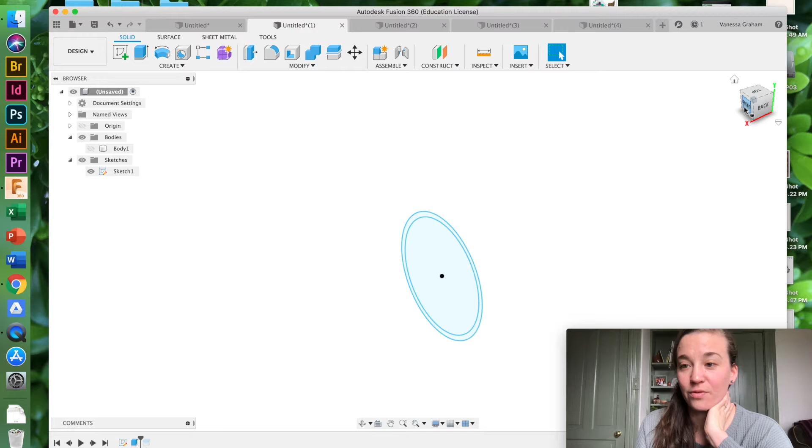So I have created my interior ring, my exterior ring, and extruded that central part to create just a plain rectangular ring, and I'm going to be working off of that in order to create a patterned ring like this one.

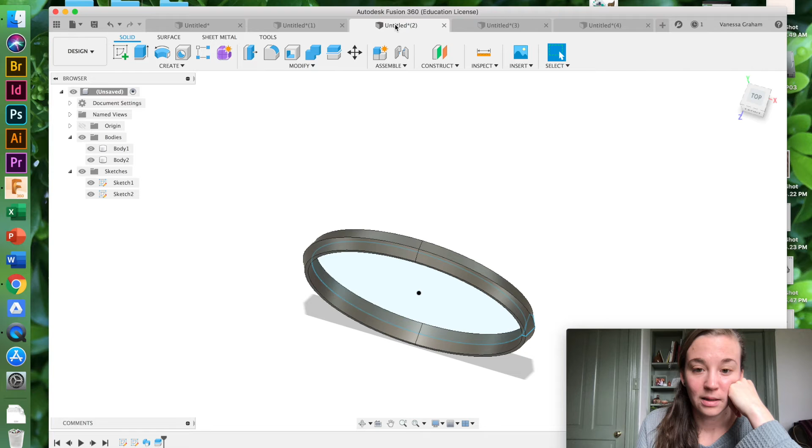Okay, so the next thing, after I have whatever ring I want to create my pattern on, I am going to decide what type of shape I want my pattern to be. In this case, I used a hexagon, and I want to create a sketch of that. So whatever I want my pattern to be, I'm going to go ahead and sketch that.

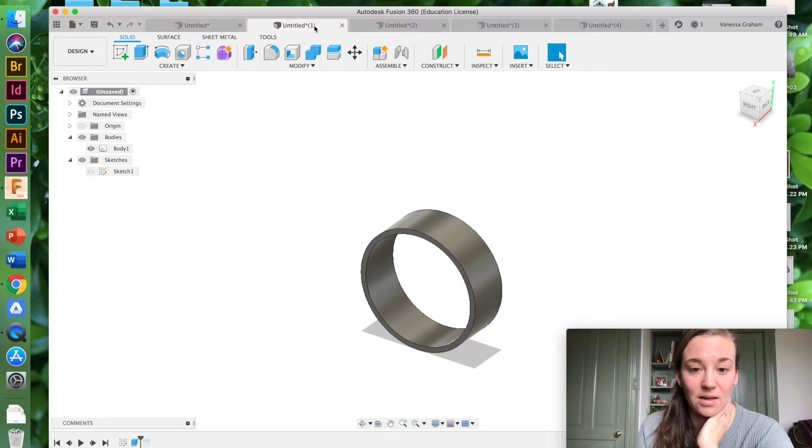And I again want to do that from my top view so I can line it up here on my ring. So create sketch on this plane. I like to turn it so I'm looking at it straight down like that.

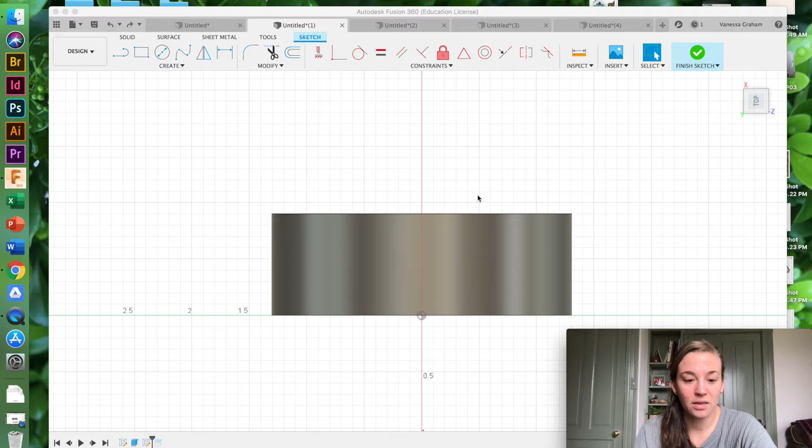Okay, so now I can choose my tool I want to create, or the type of sketch I want to create. If I wanted to do a circle, I can choose a circle. I can also choose an arc or an ellipse if I want something a little different. I use this polygon tool to create my hexagon.

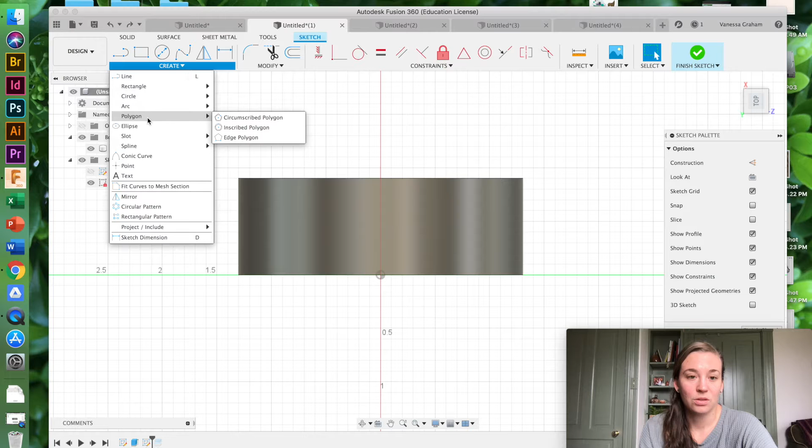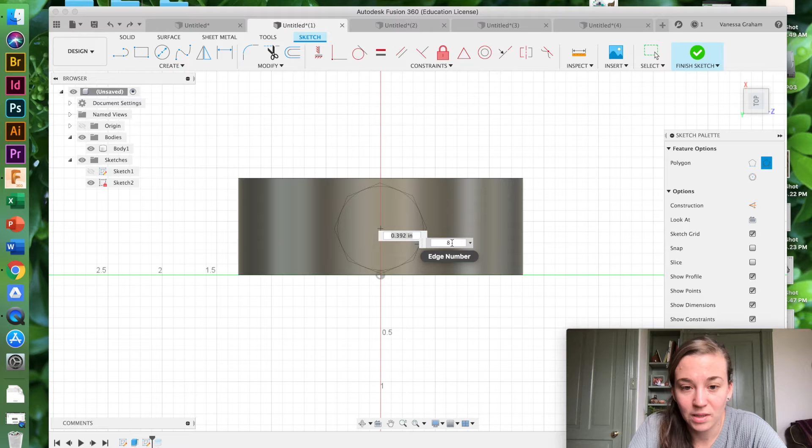So I have 3 different types of processes I can go through to create a polygon. I usually just choose the first. It's a little bit easier to get lined up, so it's asking me to place my center point, and right now I have chosen 6 sides, but if I wanted an octagon or something different, I could change that. I'm going to keep it at a hexagon, and actually I think I want to put it this orientation this time.

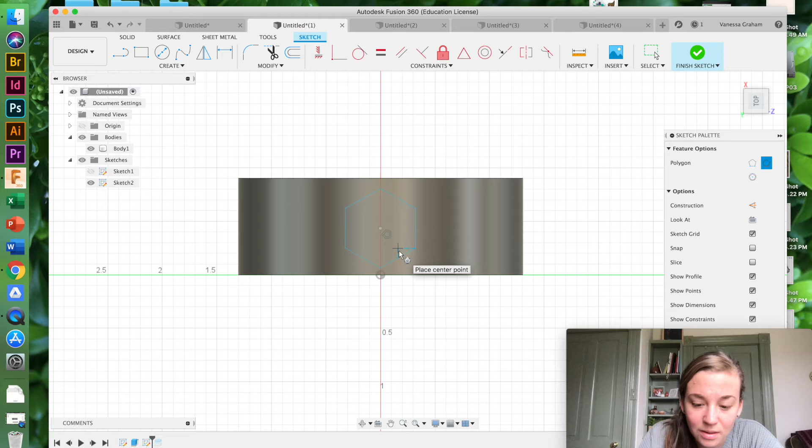Okay, so now I have my hexagon. It's not perfectly centered, so if I want to, I can move it. Again, I hit my M key, so my move copy menu comes up. Or, how else do I find it? Right click, move copy.

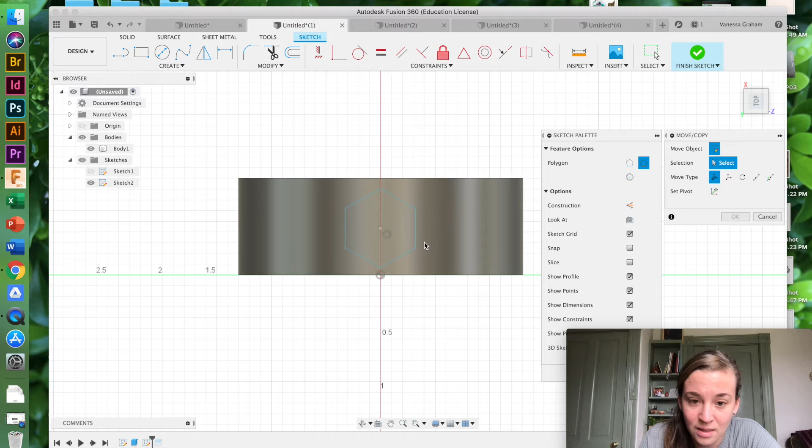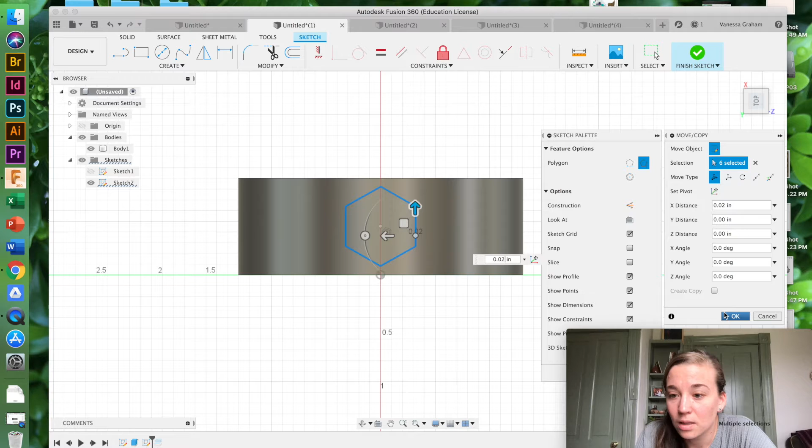So if I double click that, I will select every single line. If I do not double click it, I will only select one line, and I want all 6 of them so I can do the whole shape. And I'm going to just bump that up. Of course I need to do it just in some tiny increment. I never changed the active units in this file to metric, so ignore my inches, it should be millimeters. Okay, that's a little better.

So I'm going to go ahead, I have my hexagon, I'm happy with it. I'm going to select finish sketch. And now I have my sketch, and it is right in the middle of my world because that's the plane that I sketched on.

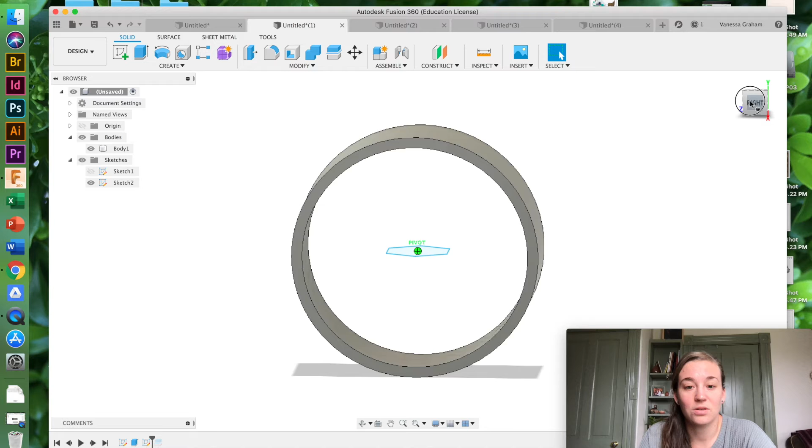So I can move it in a minute, but first, there again are multiple ways to create this hollowed out hexagon form. I went with, I can extrude it and then shell it. Let's do that.

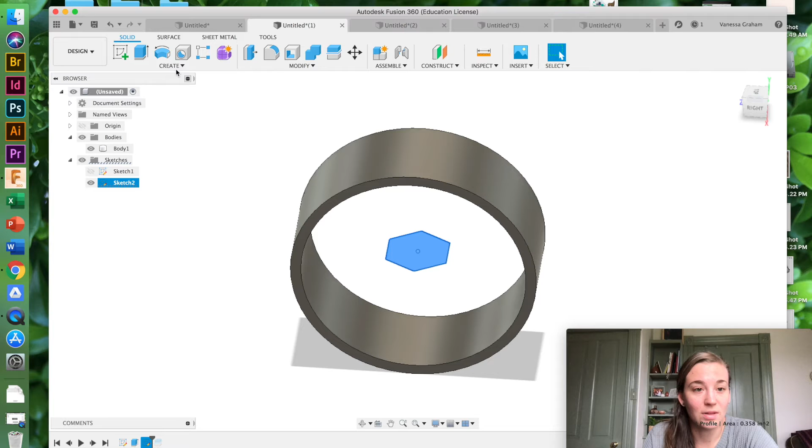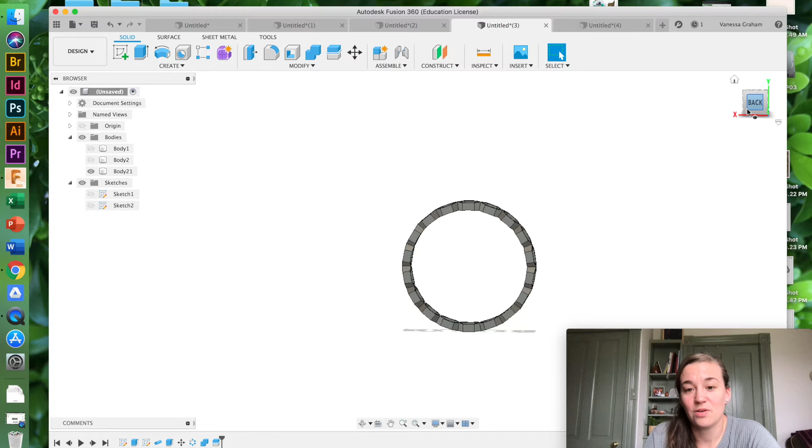So, extrude. I want it to be thick enough to cover, depending on what kind of ring you're wanting to make. If I wanted to make one that's like this, I actually want it to be fat enough to cover the thickness of my band. If I just want it to kind of be a surface detail and have a normal band underneath that it sits on top of, I don't really need it to be that thick, but we can adjust that later.

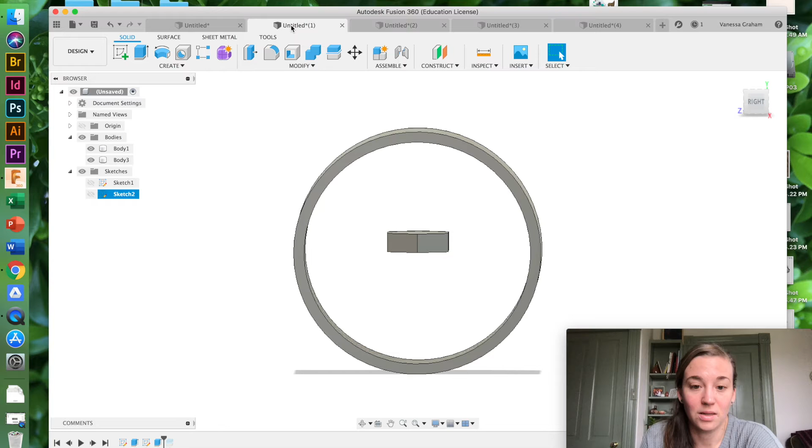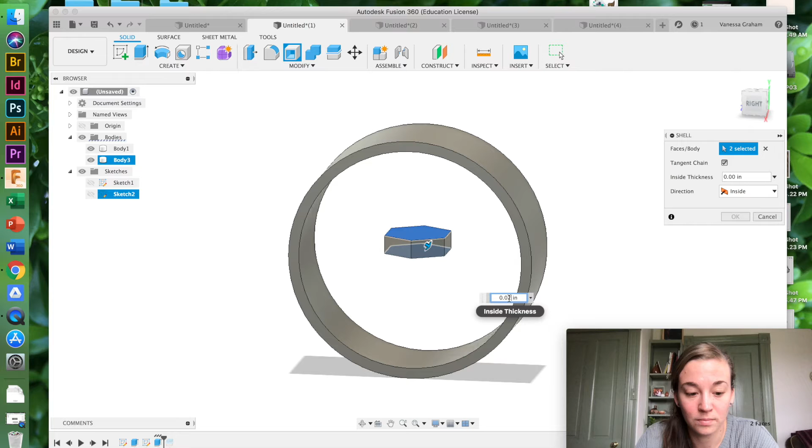So I'm gonna just, sorry, I should close some of those. Have it this large, and then go ahead and shell, and I want to shell that surface and then shift and click the back as well, so the top and the bottom. So now I have this kind of shelled out form.

I might want to make those walls a bit thicker. Oh wait. Well. Let's see, 1.5.

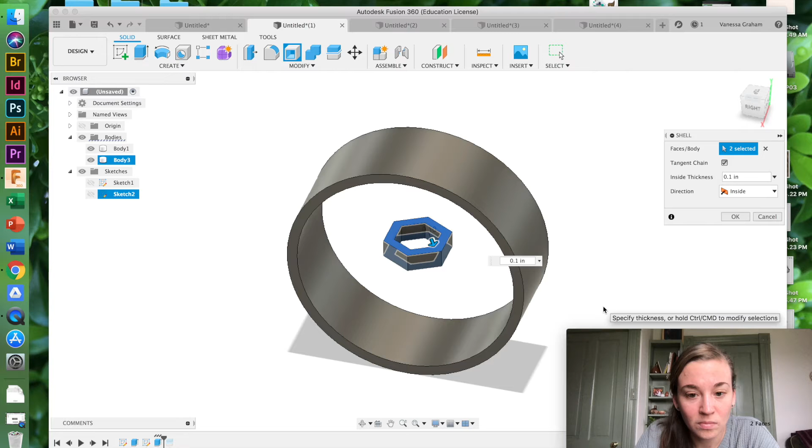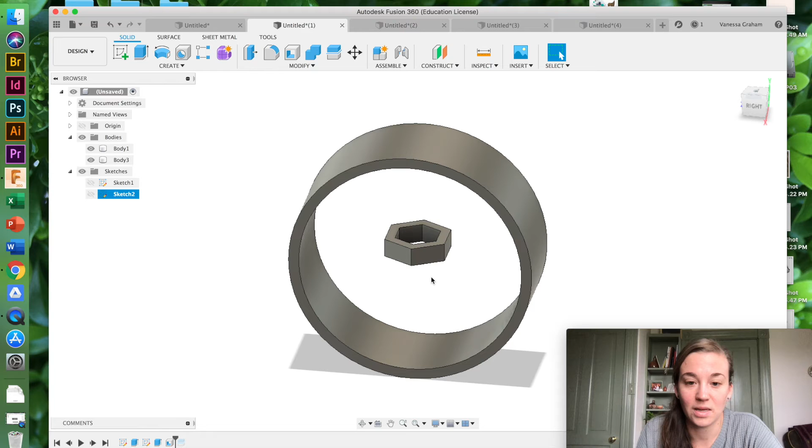Okay, I'm just being picky now. It's a little bit thicker than the one in my other ring, but I'm going to go ahead and move that now. So again, my M key, or I can right click anywhere on my screen and select move copy from there. I'm going to move this up and rotate to my right view so that I want them to be overlapping.

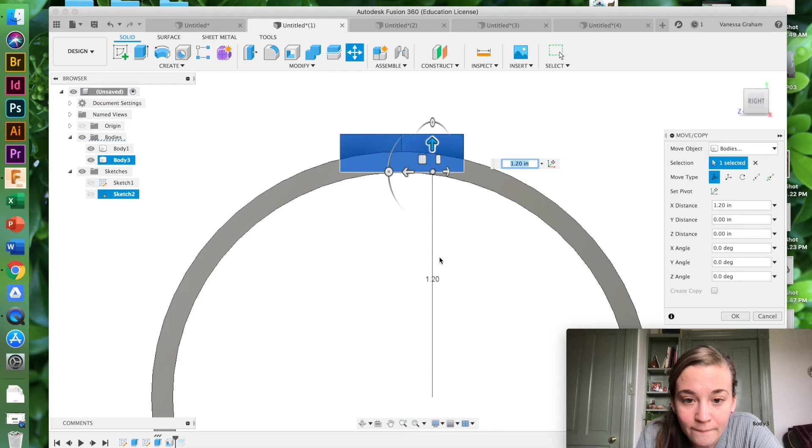So now I have this little detail, and if I wanted to, this is good enough for the project. I can just add one little sketch. It doesn't have to be overly complicated. It can just be a geometric ring. But if I want to continue this around the exterior of my ring, I'm going to use my pattern tool.

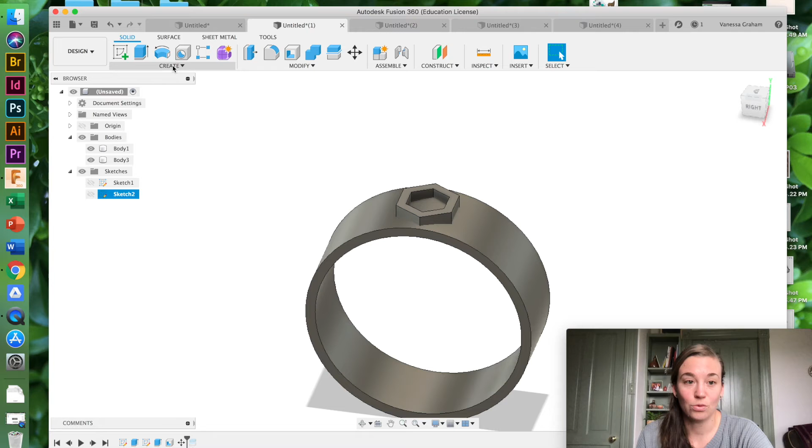So create, and then pattern. I want to create a circular pattern. So what object do I want in my pattern? I want my hexagon. What is my axis? It's this central one straight through the middle of my ring. And then I'm just going to put as many as I want on there.

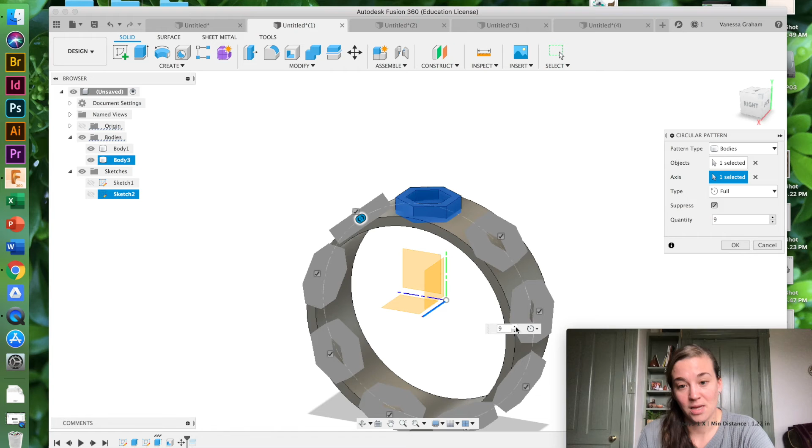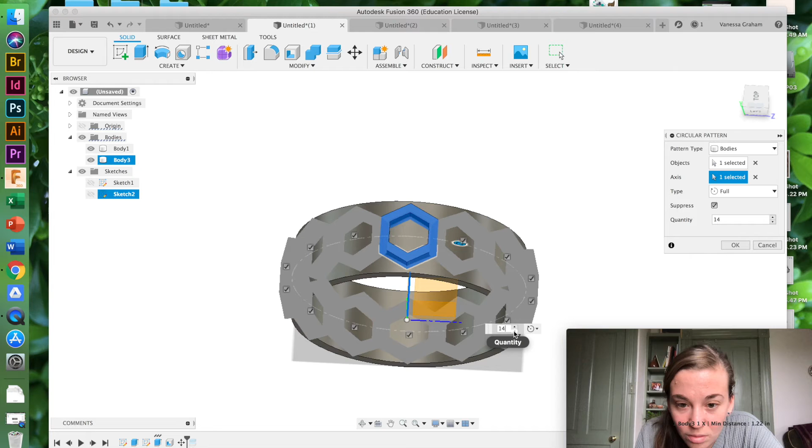I can have them touch, I can have them not touch. I want them to overlap a bit, and it's kind of hard to tell. I can always edit it later, but I think that might be too much. Okay, I'm going to do 14. See what that looks like. That looks okay.

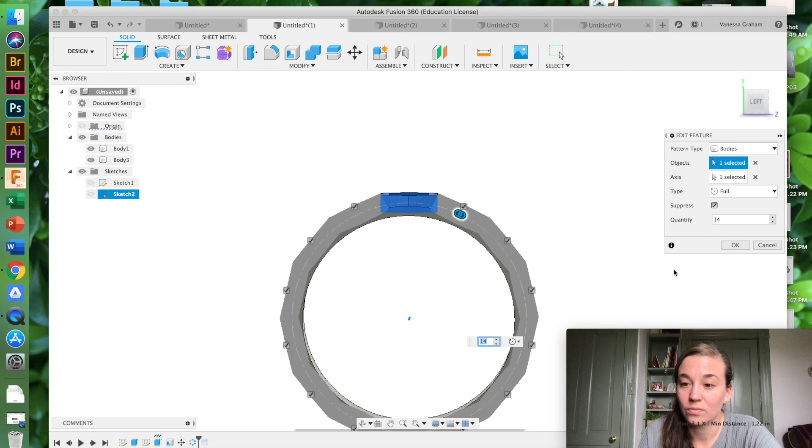I might add one more. I'm being picky. Okay, so yeah, this is another option to just add some detail to the surface of your ring.

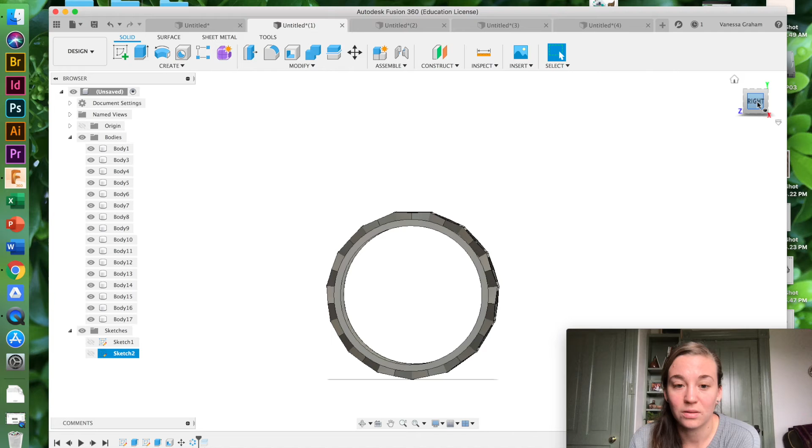If I want to have them cut through, I do need to make one little change, because they need to completely intersect my band right now, and right now they don't go all the way through my ring. So I do need to go back in here and edit that feature, make it a little taller.

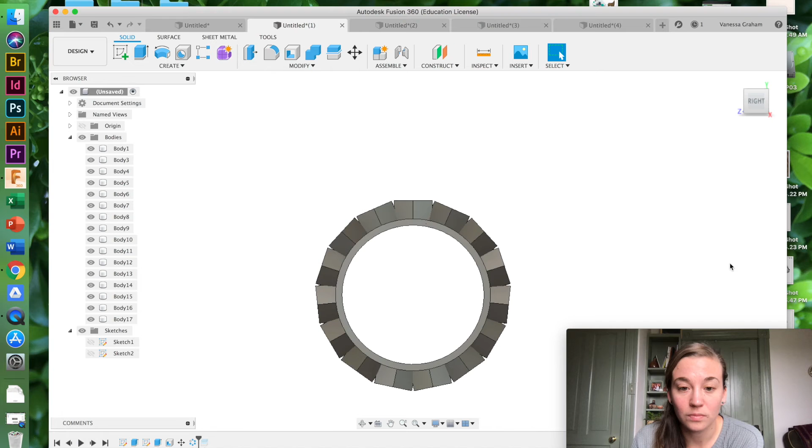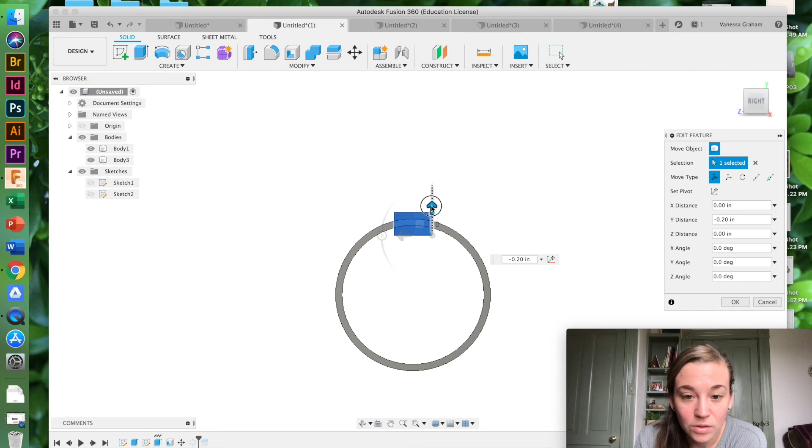Edit my move. Why aren't you letting me? There we go. So that it completely cuts through and completely overlaps that guy, and hit OK.

So if I want to create this kind of hollowed out form, that's what we're doing right now.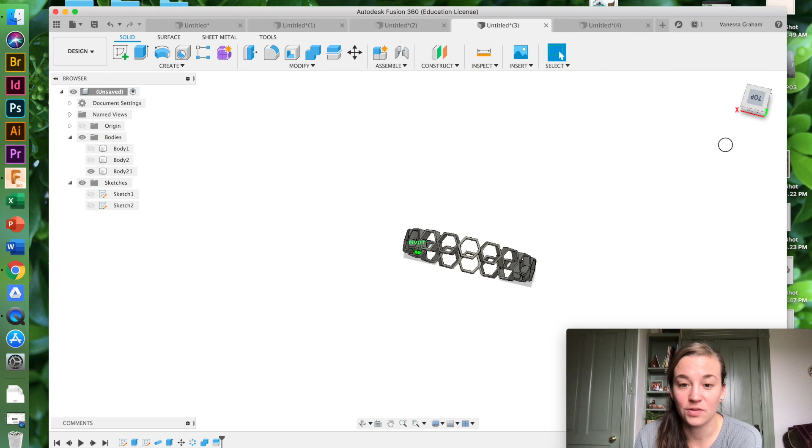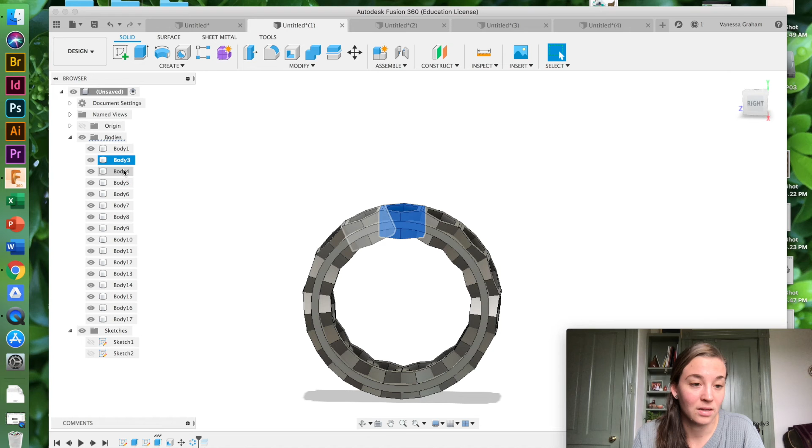Okay, I'm going to go ahead and combine all of these hexagons into one body. So select one and hold down my shift key. Alternatively, I can do them all at one time.

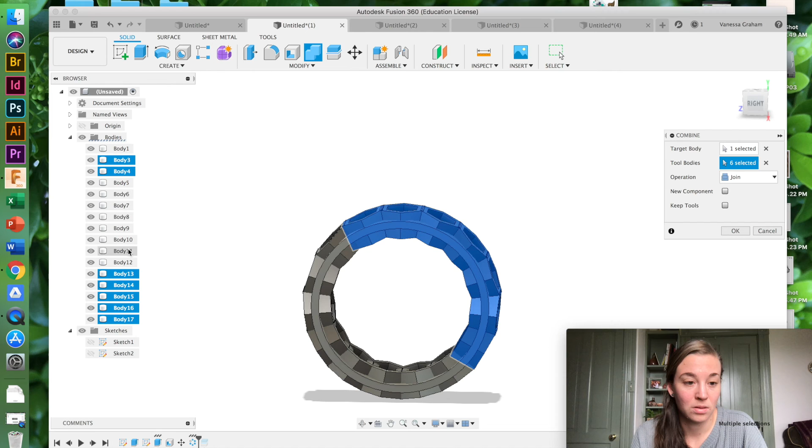Also, if that's not working for you, I can drop down my modify, select combine, and then just click on all of my actual bodies. Okay, join. There we go. So now all my hexagons are one, and I still have my ring, which is one.

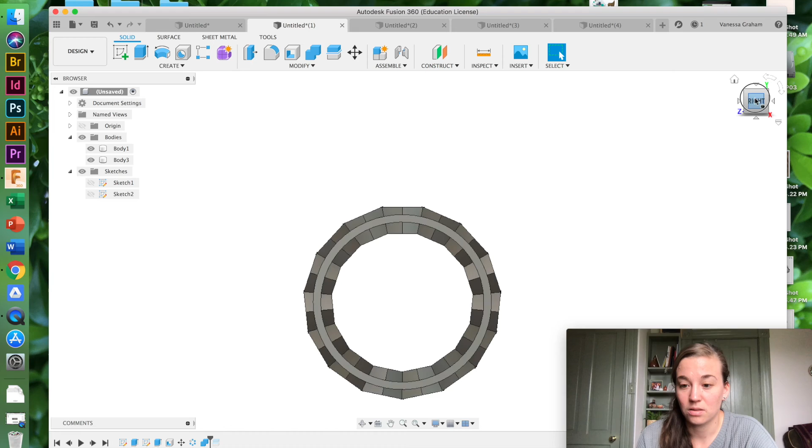And I'm going to combine these and cut. Okay, a split body, not a combine. Duh. Okay, so the body I want to split again is my hexagon ring right there, and my splitting tool is the interior of my ring, so this little guy right there.

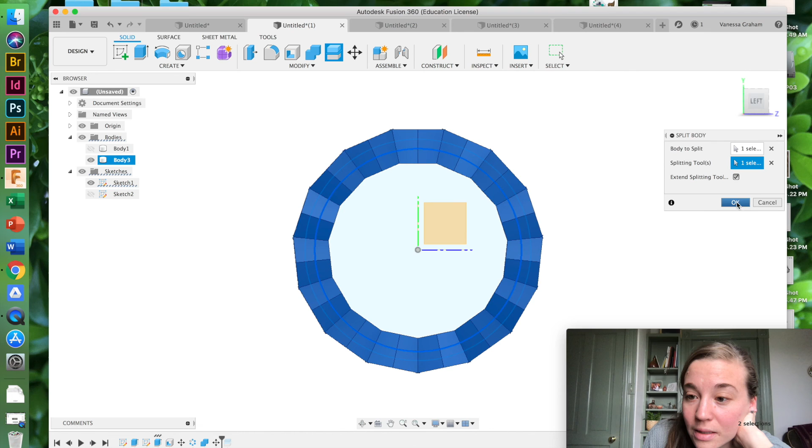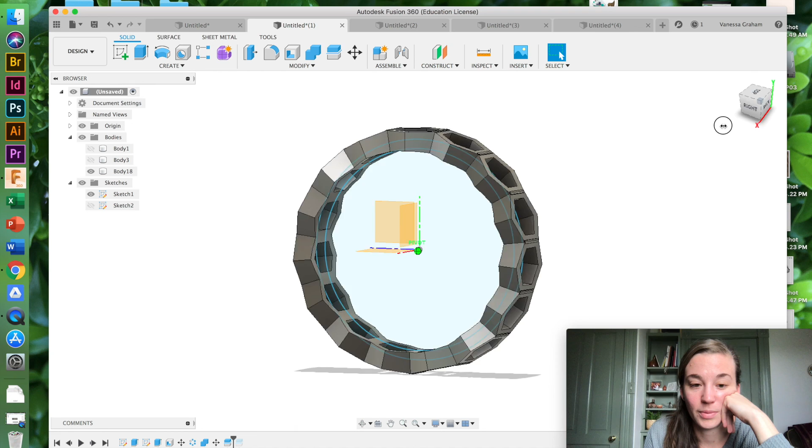So there you can see it's cutting, and it's cutting right on the ring size sketch that I made, so I can hit OK. And now it has cut it, so that bottom part is the part I don't want. And I can turn that sketch back off again and my origin back off again, and this is what I have.

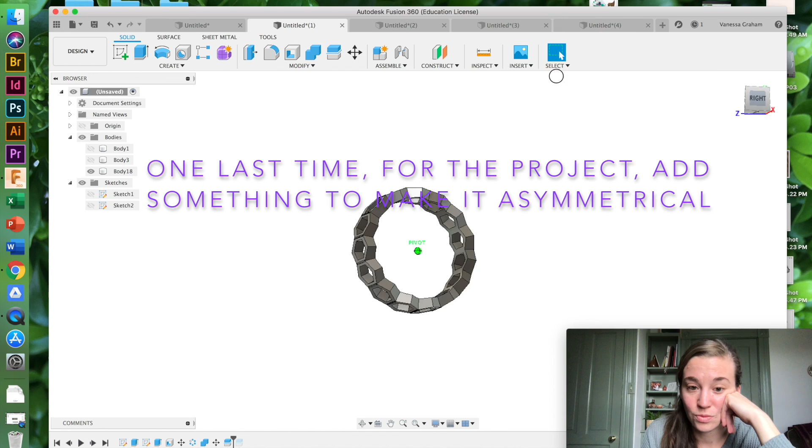Ta-da! So a ring, a geometric ring, that is a little bit more everyday wear than those other sculptural ones. So yeah, if you guys want to do something a little more simple, you can do something like this. Do something a little bit different to make it your own. So just play around with the sketch that becomes the pattern.

You can even do two and offset them so you can get a little bit more of a honeycomb effect.